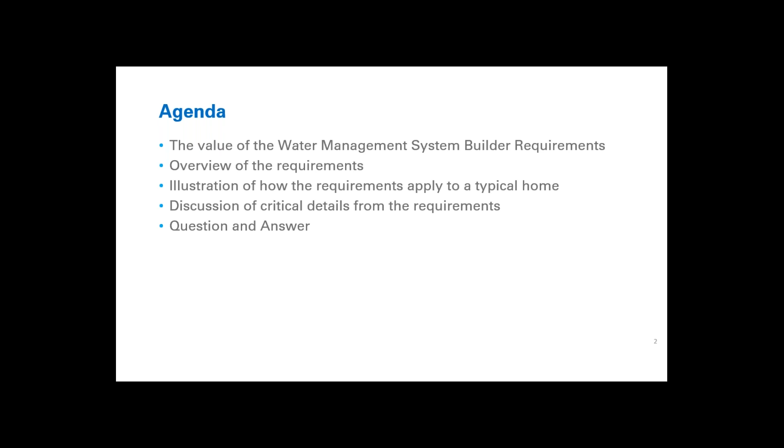Okay, so before we get into it, I thought we'd take a poll here to get everybody's impression of the water management system builder requirements, which is kind of a mouthful, by asking a few polling questions. The first question is, how difficult will it be to complete the water management system builder requirements? So again, this is just your impression of the difficulty here. Do you think it's going to be easy, hard, or are you not sure?

And so I think we're going to pull up a poll here. You should see it on the side of your taskbar. And we're going to leave that open. Okay, so sorry, I just want to confirm, are we closed on that poll? Yes, I'm not sure if you were able to see it or not. Yep, I see it. Okay, so let's see. We have a good amount of people saying it is, it's very small for me.

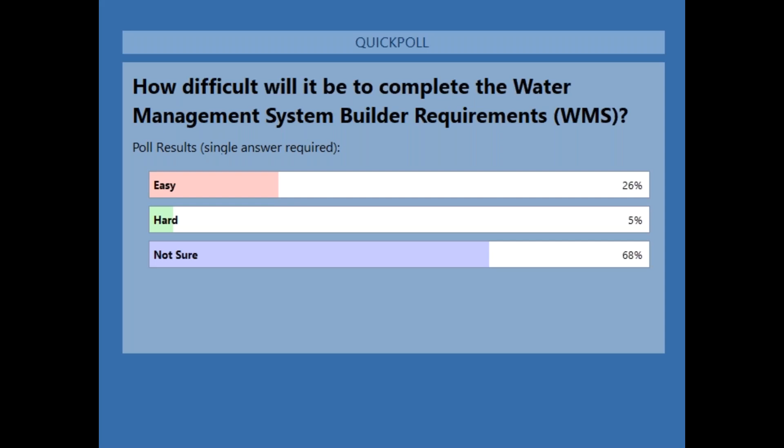What do we have? 26% saying it's easy, and 68% saying not sure. So only 5% saying it's hard, which is awesome because I think that's pretty accurate. I think most of the stuff is pretty easy. So for those who aren't sure, hopefully that's the impression you'll have by the end of this webinar. Okay, so we'll go into the next question then.

So the next question is basically, how much do you agree with this statement? The requirements of the water management system are valuable for homes. Do you think that's generally true, not true, or not sure?

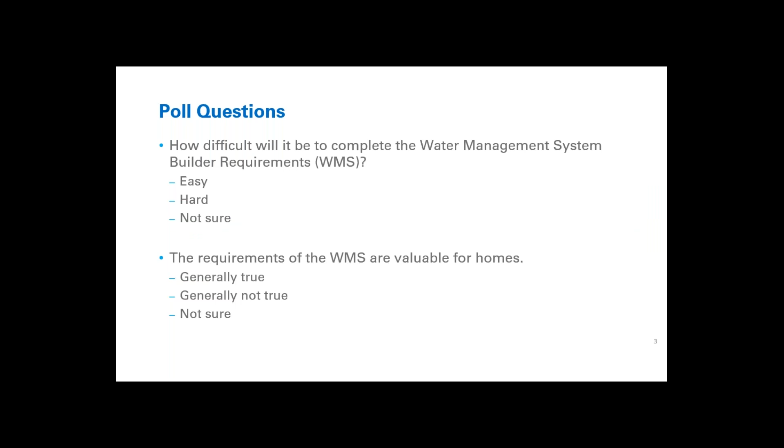Great, so we have 63% of people saying it's generally true, nobody saying it's not true, and 38% not sure. So in other words, most of the audience agrees that it is valuable, which I think is definitely true. And we'll have some education throughout here for those of you who aren't sure. Okay, so that's really great to hear. That's a great starting point.

Before we even talk about what the requirements are and what exactly you have to do, let's start with the value of doing it. If you don't believe in the value of it, then it's harder to justify meeting these requirements at all. So we need to know why it's important. And when we talk about the water management system, I want to be clear that we're not talking about low flow showers or faucets or something like that, right? This isn't about water conservation.

We're talking about a collection of building details that will help manage the moisture on the outside and inside of the home. So why is it important? I'm going to talk about three main reasons, and the first is improved durability. If you build a new home, we would want it to last for a while, decades or more, right? And so to be durable, the materials need to be moisture managed.

Now, if we think about an inefficient home, there's a lot not to like. It doesn't have a lot of insulation in the walls. It's got lots of air infiltration. And so if it's built like a barn, it's not necessarily going to be a particularly comfortable home to live in. But one thing that it has going for it is that if there's a water leak that's getting into the wall, it's going to dry out fairly fast.

The reason for that really is the more heat that's moving through that wall is going to sort of act as a drying force. And so if you've got a lot of air moving in that wall, and if you don't have any insulation in that wall that's moving heat through that wall, that's all going to dry out moisture pretty quickly. And so it means that you've actually got a pretty wide tolerance for error in terms of letting water in. And so it can be kind of a saving grace for details that aren't done 100% right.

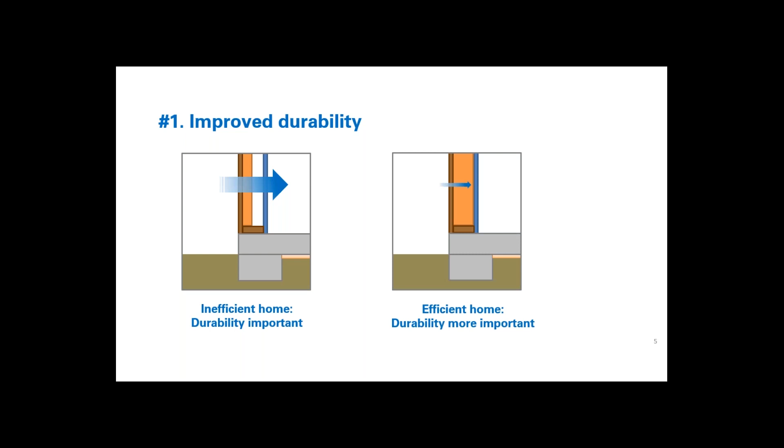The second thing, I'm sorry, I missed some animations there. Okay, the second reason is related to number one, and that's reducing liability. So if you build a home and it's supposed to be energy efficient and it isn't, that's not awesome. It can mean higher bills and less comfort for the home buyer. But if a home's water management system is incomplete, that's a much more serious problem. And the cost to fix it can be a lot higher as well.

So probably everyone on the webinar has heard at least one story about new homes with moisture problems of some kind. And we don't want our Energy Star builders to fall into that category. And the water management system builder requirements is really meant to help reduce that risk.

The third reason, which I find pretty convincing, is that it's code, or basically all of it is. So you're supposed to be doing it anyways. You can trace nearly every one of the requirements on this list directly to a code requirement. And we've really tried to mirror those requirements as much as possible. Okay, so if it's part of code, then why are we including it in the Energy Star program, right? Like, aren't you already required to do it?

Yeah, you are. But as we've discussed, these are just extra important to get right in the kind of high performance homes that we're building. So, I think we know, unfortunately, code is not consistently enforced, and sometimes these items are overlooked.

All of the requirements fit onto one page. It's the builder's responsibility to ensure that these are met for every home. So the builder must develop a process that works for them. So, for example, and this isn't inclusionary, but just for example, they should probably integrate these into the scope of work. They should probably require the site supervisor to verify each requirement, and they may want to contract with a rater or a third party to ensure compliance, or at least spot check it.

I think you'll see that a lot of this stuff is kind of conceptually intuitive and makes sense. It really comes down to the details of applying it where it gets a little tricky. So sometimes it does certainly help to have a professional on board who's specifically looking for these items. A home that doesn't meet these requirements cannot be certified. So these are non-optional requirements.

But in terms of how we're including them in the program, functionally, note that no paperwork needs to be completed or collected by the rater for each individual home. So this is a change from when we first launched version 3. A lot of partners told us that collecting the piece of paper itself was not adding a lot of value, and so we've limited that paperwork burden.

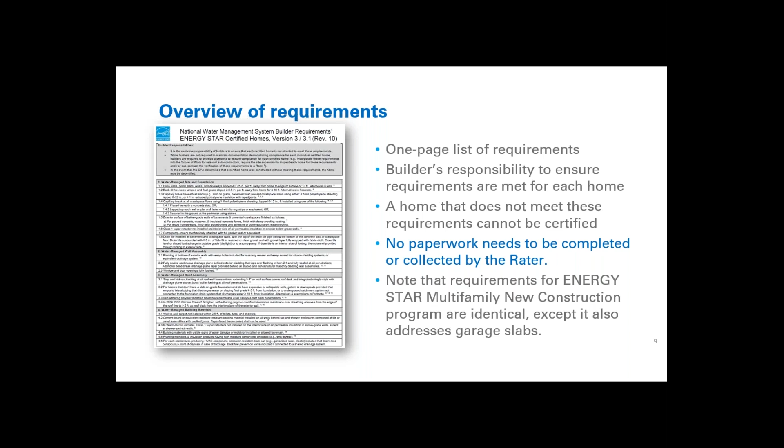Okay, so there's 4 sections to the requirements, and we're going to walk through them from the top of the house to the bottom, which obviously is the direction that the water falls due to gravity. So on the roof, we want to ensure that the rainwater gets to the edge and off. So that means extra protections at valleys and penetrations, at roof wall intersections, and at the perimeter of the roof in cold climates. And it means gutters and downspouts or an equivalent system, unless you have a slab on grade home or your soil is not expansive or collapsible.

On the walls, we want to make sure that rainwater gets from the top to bottom and then away. So that means a continuous drainage plane, paying extra attention to windows and doors, and flashing and weep holes at the bottom to kick the water out and away.

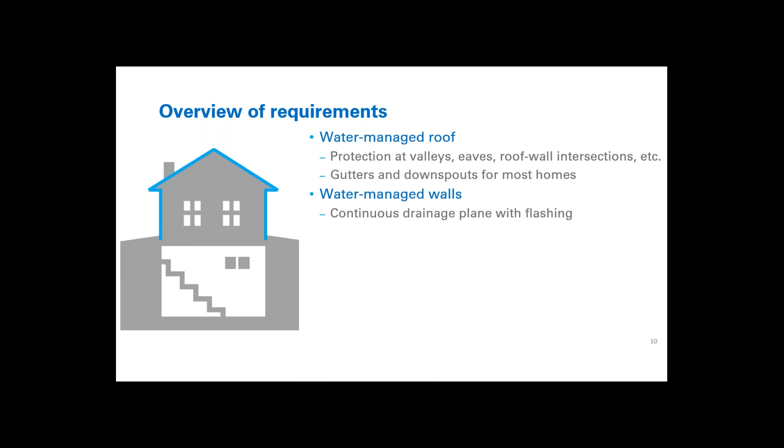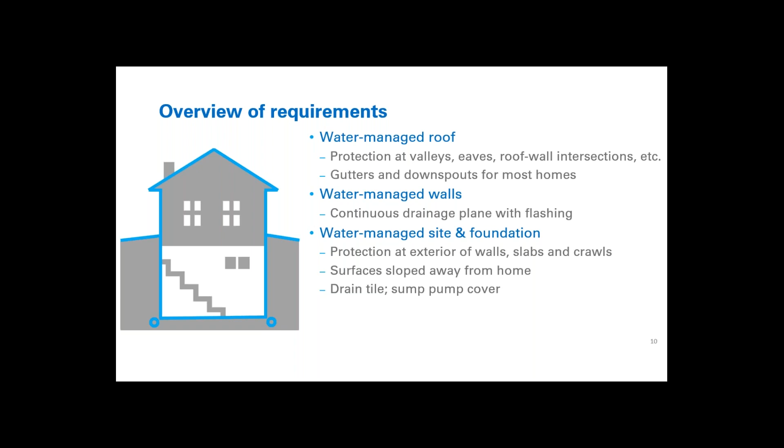And at the foundation, we want to make sure you have moisture protection at the exterior surface of the foundation walls, beneath slabs and in the crawl spaces, that surfaces are sloped away from the house, plus a drain tile, except in slab homes, so that you can move that ground moisture away from the home. And finally, a sump pump cover and no vapor barrier on the inside of below grade walls. So I know that's a lot. We're going to come back to it.

And the fourth item is there's a section on building materials to address bathrooms, high moisture or water damaged materials, HVAC condensate, and in warmer climates, vapor barriers on interior walls. So a little bit of a grab bag there. So that's it. It's a common sense collection of 21 very achievable details.

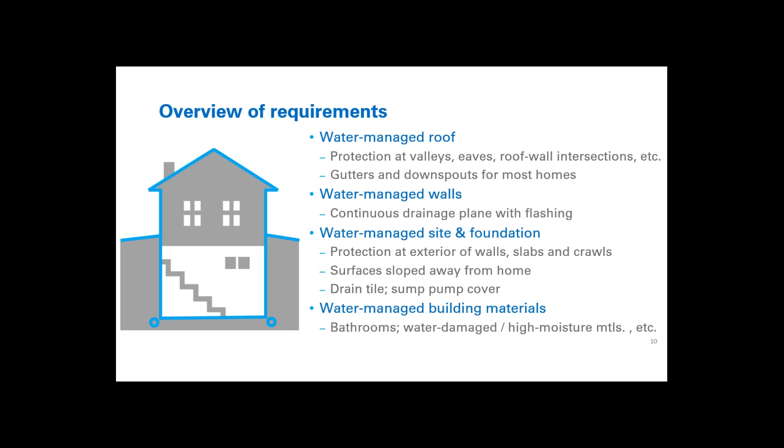And think about how important each of these are to the house and how expensive they would be to correct after the fact, right? And when you think about each of the 21 details as we go through them, I think you'll probably agree there is not a single one of them you would say is not important and you wouldn't want in your own house. And even though there are 21 items, not all of them are going to apply to every home. So let's walk through a typical home as an example to see what you might have to do in practice.